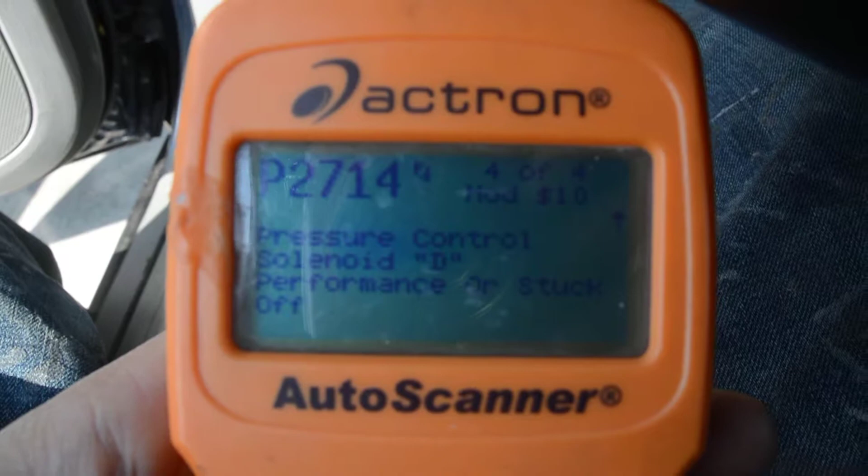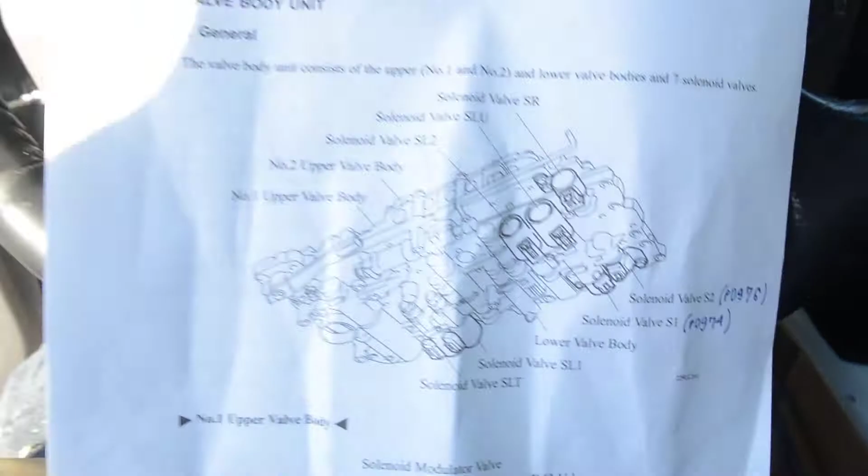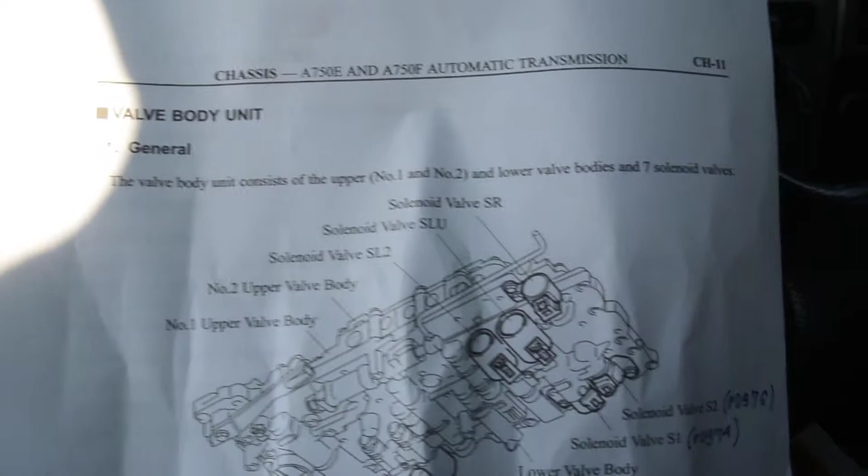Earlier there were 5, and I went online and printed this instruction, and it seems like for this year 2003 4Runner V8, it has an A750F transmission for 4-wheel drive, and A750E for rear wheel drive. I'm assuming they're the same inside.

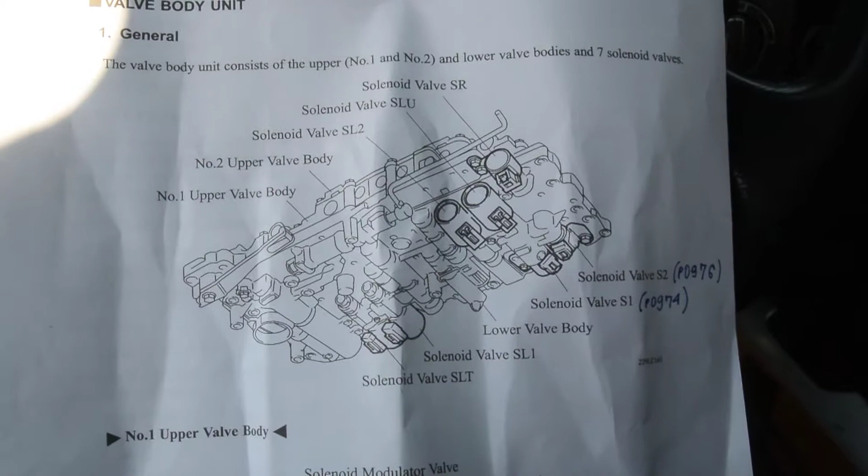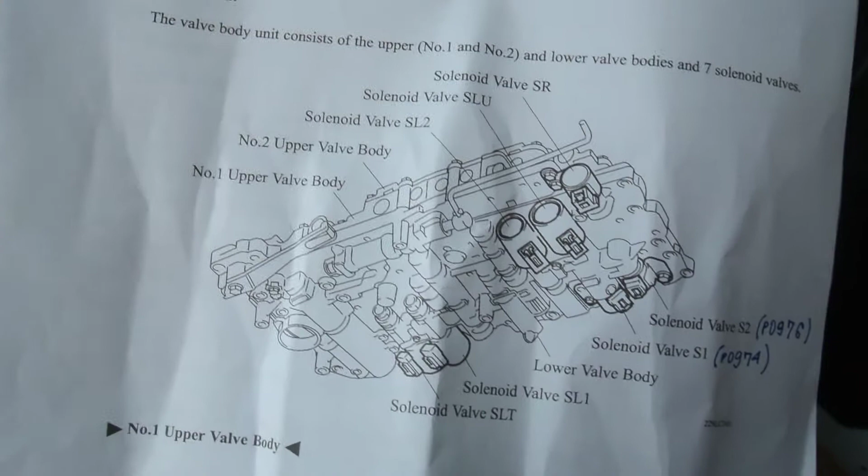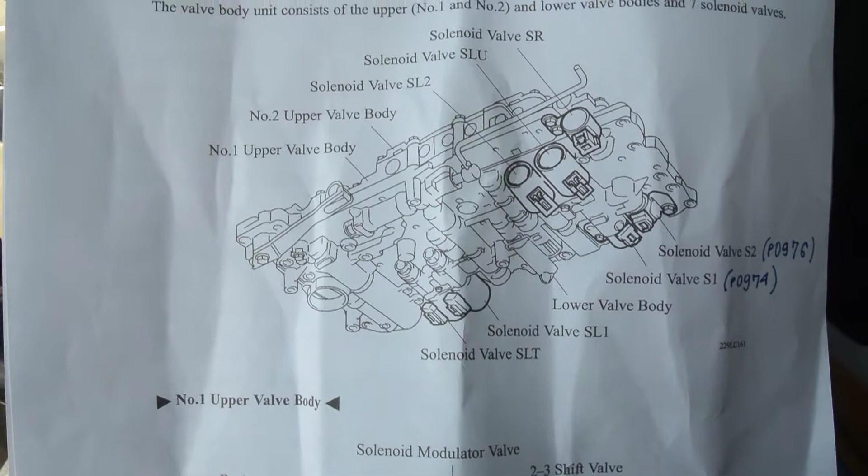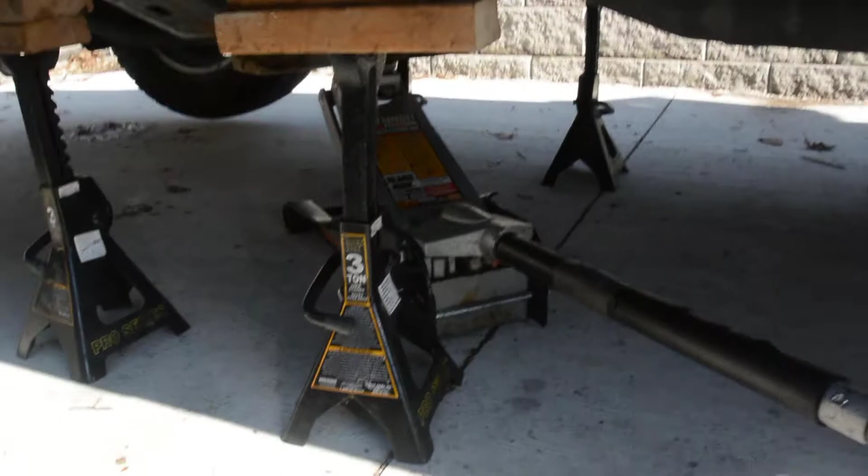So right now, today, I'm just gonna try to remove the pan, and since I do this kind of after work, I do a little bit today, next day, and I already drained transmission fluid from the car. I put the emergency brake on, but I don't think it matters when the car is already jacked up, just in case, I guess. It only does the rear wheels. So I already jacked up the car from all sides and put the jack stands and the jack.

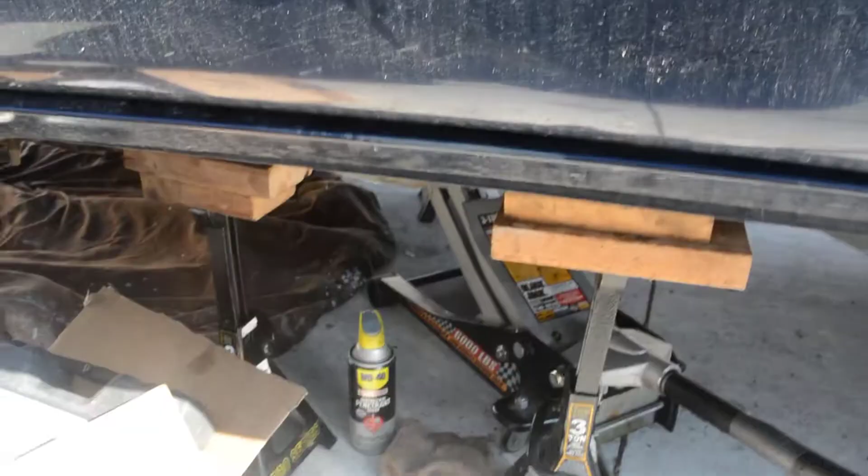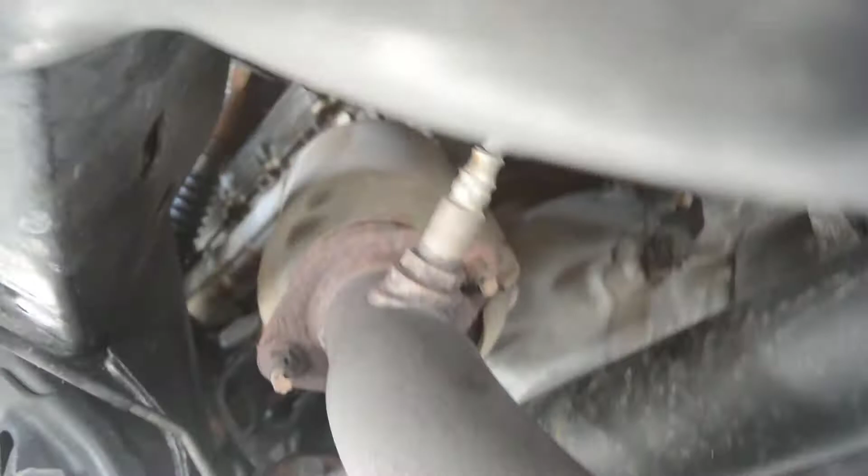So from my understanding, I have to disconnect this pipe so I have access to the transmission pan. I'm gonna use a spray on both sides, here and over there, and see if that helps. And also disconnect the oxygen sensor connector as well.

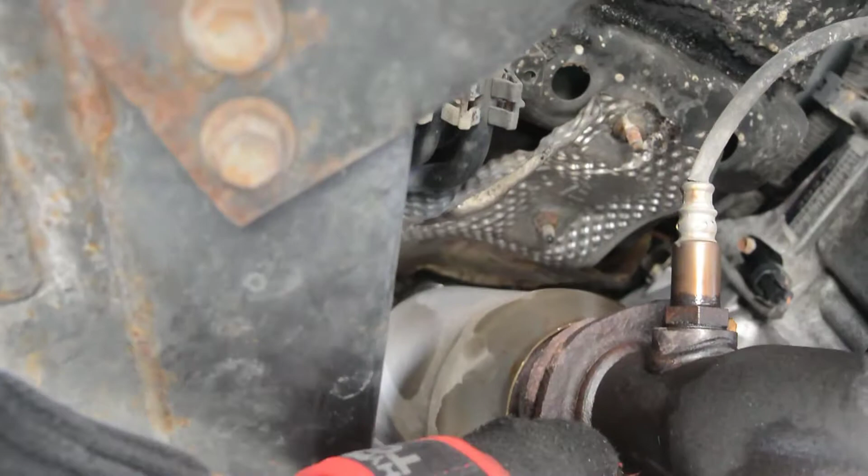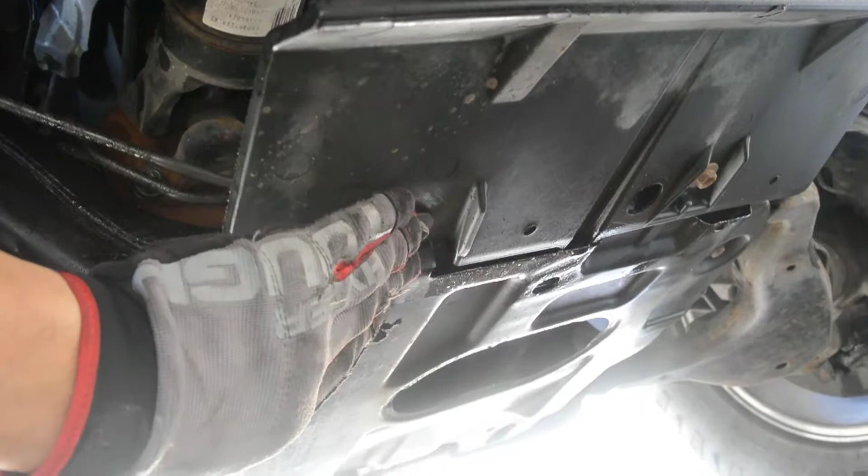So I have been trying to remove these bolts, but it's kind of hard because I don't have any special tools, just the regular breaker bar, and it slips when I try to undo them. I have some ideas what I can do here, but I'm gonna try to remove this pan without dropping this pipe. See what happens. I just realized I need to remove this plastic piece also, and it has two bolts, 12mm. Since I'm gonna work on the car for some time, I decided to disconnect the battery. I read somewhere it's a good idea.

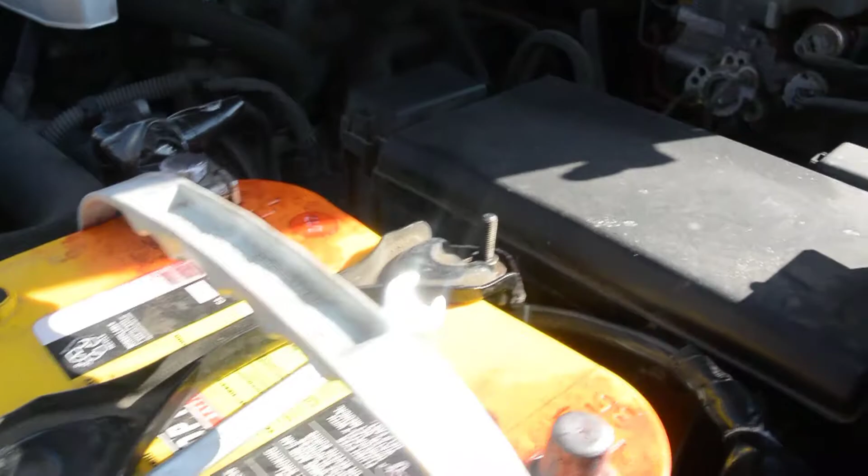I have removed all the bolts from the pan, and I'm gonna use this pry bar tool to try to remove this. Oh, it seemed like it dropped. Okay, and there is something holding it there, and I think this is just gonna come out. So from my understanding, to remove the dipstick line, I have to disconnect this bolt right here.

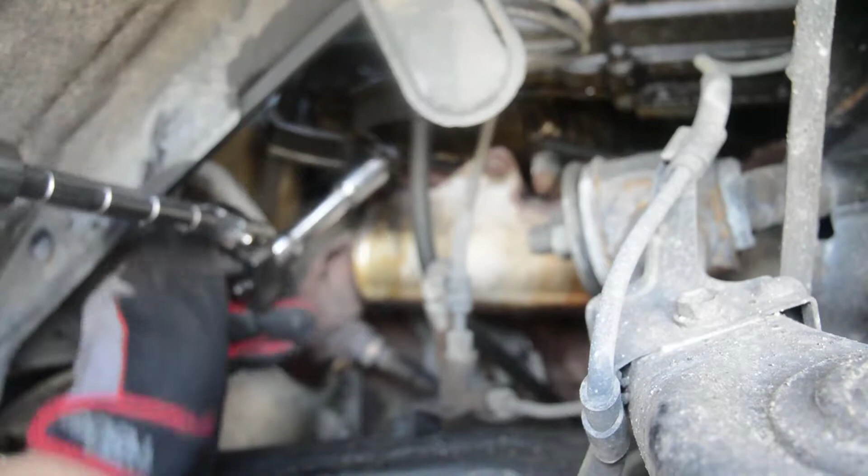So it looks like in my case it's easier to remove the dipstick tube from the passenger side. Well, I didn't have this here, so that's why it's easier. It looks like it's 12mm. I have disconnected the bolt. Now it looks like all I have to do is maybe rotate this back and forth to disconnect the upper from the lower dipstick tube.

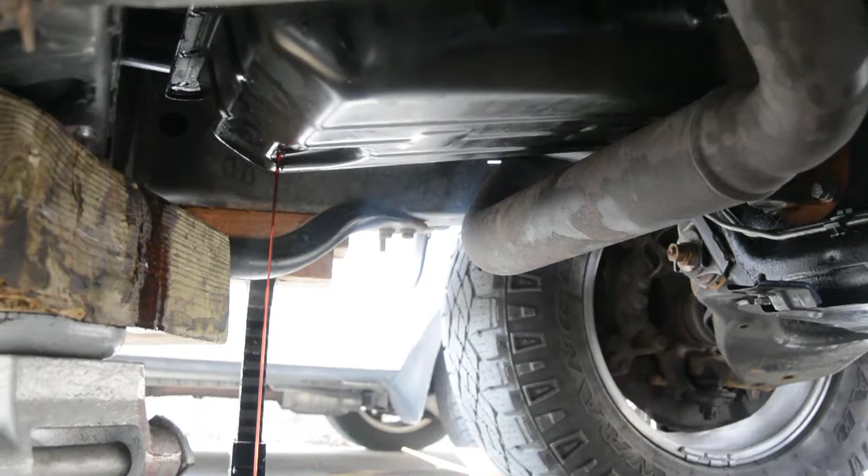Okay, so I'm still trying to disconnect this part right here, and no success so far. Maybe use something like this. Keep going. I also decided to remove the drain plug and release some more oil. Seems like there was some more, even after it all drained the first time. Probably because of the way the transmission fluid pan is tilted. That's why I think more is coming out.

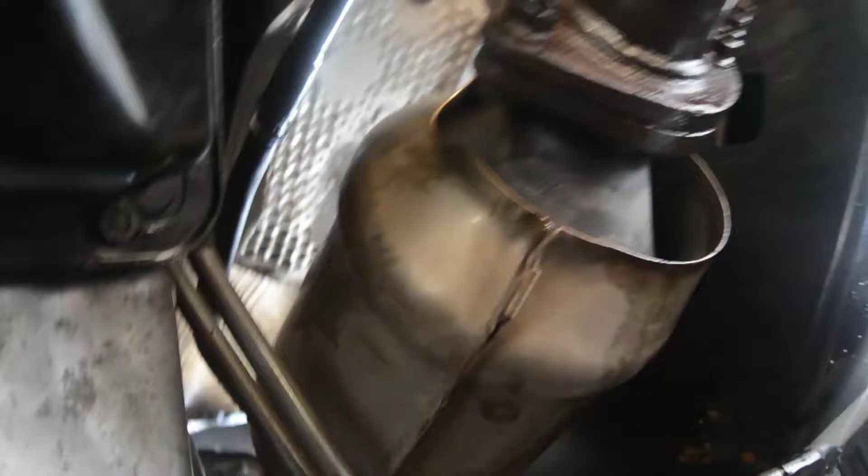I have put two bolts back on the pan so it doesn't move. What I realized is I should have removed the dipstick tube first before removing this. So I put one or two back here, and now I use this tool, I'm not sure the name, and I kind of hit it with the hammer on this side, and it looks like it's coming out now, so it should be fine. So now it should come out, I believe. Okay. If I'd done it again, I would have done this differently. And now I just want to make sure it's correct when I put it back in the right way.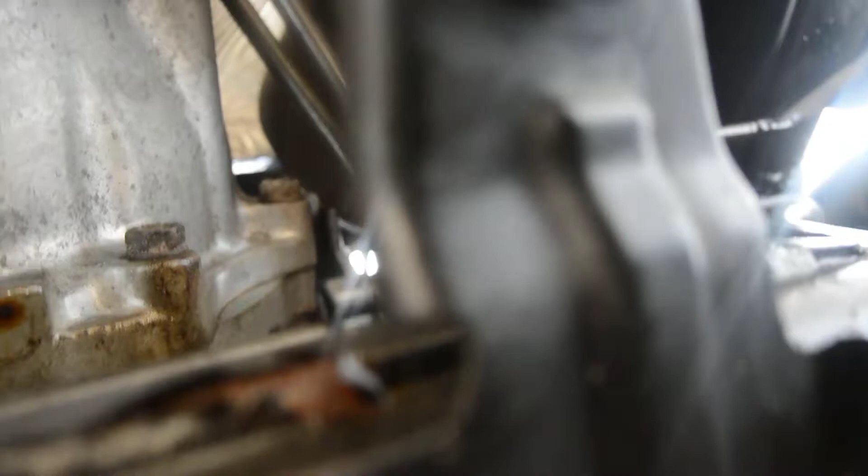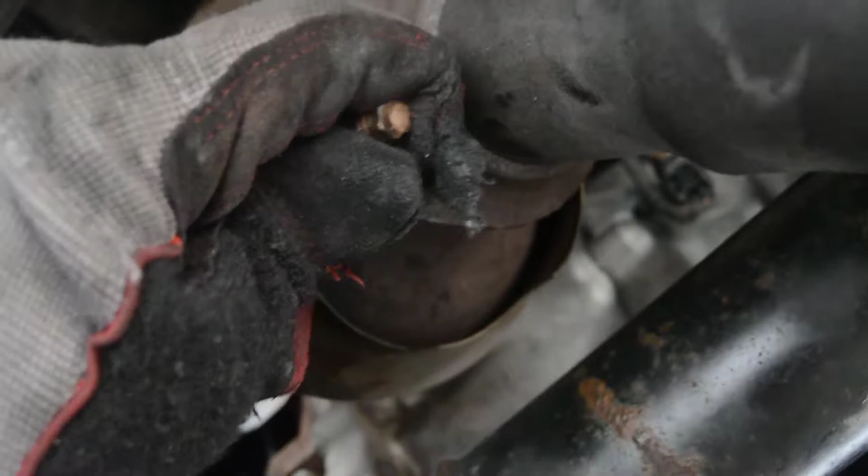So I have removed the dipstick tube, but I realized there's no way to remove the pan. There is no space. So from what I read, I need to remove this, I guess, cross pipe, and from what I understand, I need to have a torch and an impact wrench. I have a torch but no impact wrench, so I'll need to come back for this later. I'm gonna put the oil pan back with two bolts.

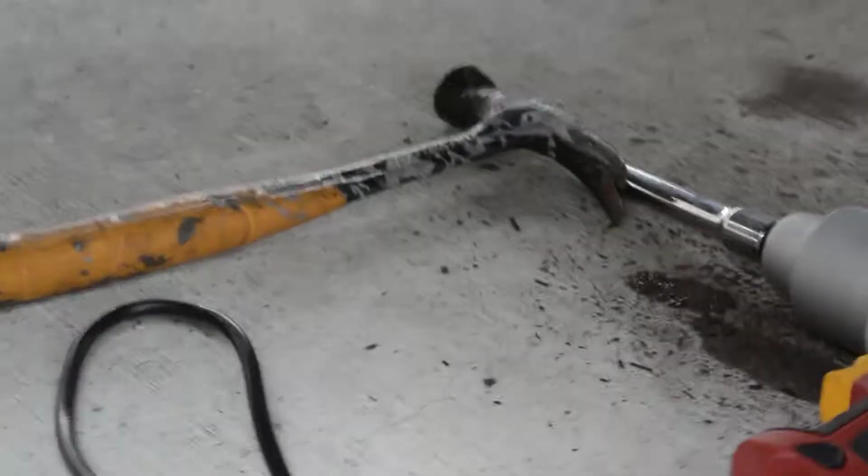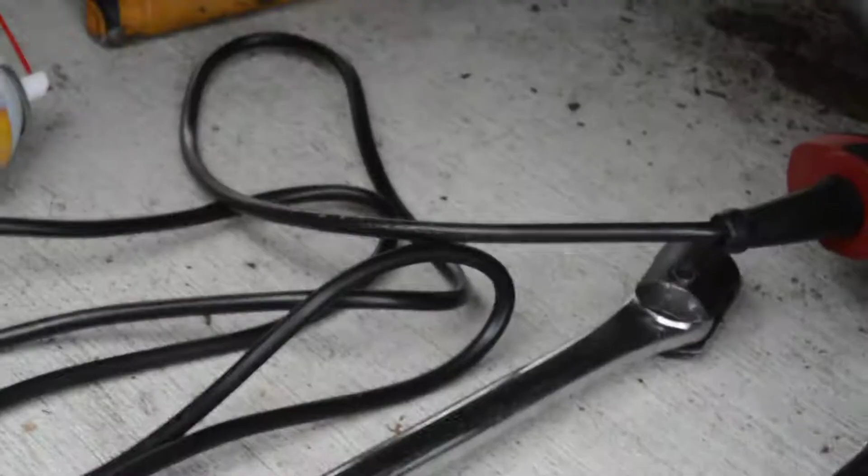I was able to remove the bolt from the exhaust cross pipe. Before, I used this breaker bar and nothing happened, and I went online and read that I needed to get an impact wrench, and yeah, it's actually amazing. It worked. And this one I got from Harbor Freight for $40.

I have removed the bolts, but the pipe is still not moving well, and I think I need to remove this. I'm not sure the name, but these things are holding it. I'm gonna spray it, and let's see, and try to remove it.

I'm using white lithium, but I think the best, from what I read, is to use WD-40. I don't have one. I'm gonna try to pry it with this flathead screwdriver.

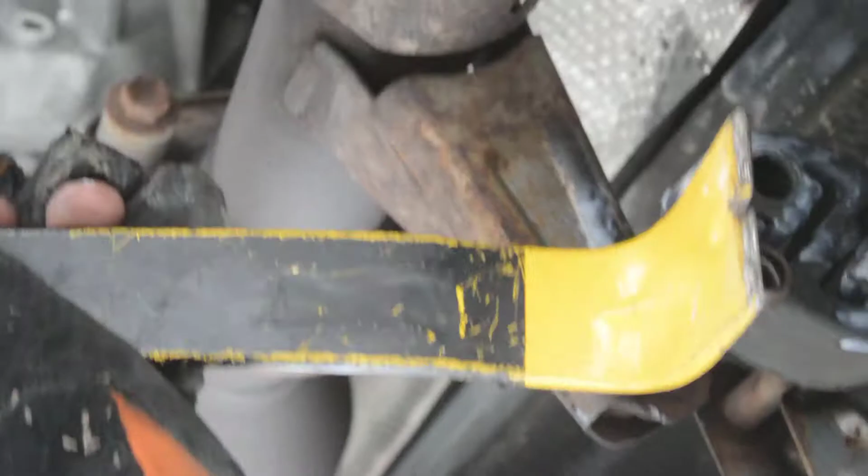So I have removed these rubber holders. I decided to use these two little crowbars and just pried it. It was easier to use that, but I think any tool could be used, whatever works for oneself.

I have realized this pipe is still not moving as much as I wanted, so I think I need to remove these as well.

And this is really good too, I like it. Wow.

I have removed the bolts. This bolt on this side actually stayed, but when I removed this bolt on this side it came out this way. I'm not worried now, I'm just gonna put it back how it was later. I mean, it still has the threads.

And now I need to disconnect this sensor cable, and then it looks like this whole cross pipe should drop. Okay, I have disconnected the oxygen sensor cable, and I just moved this down with my hand, and it seemed like the pipe came down, and I have enough space now here with the transmission fluid pan to move it down.

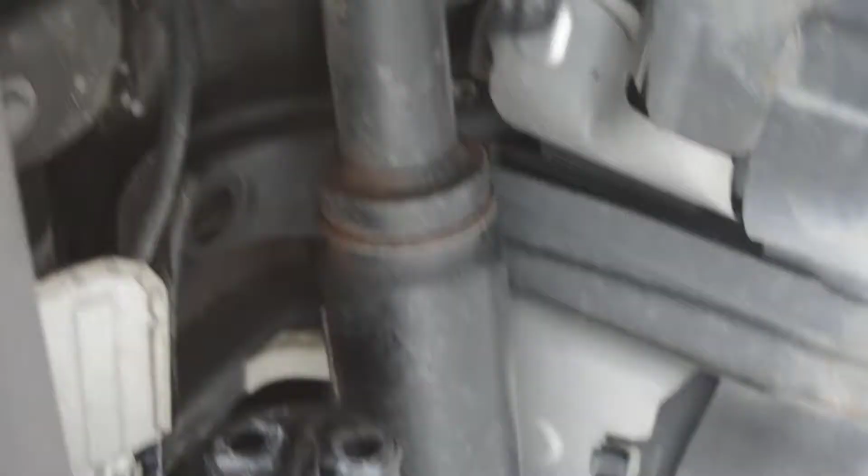Definitely helped that I removed these parts here and over there. Now this pipe can flex. And I just realized, so I don't lose the bolts, I'm gonna put them back here for when I'm ready to install. I don't have to look for them. I'm gonna do this from both sides.

So I'm ready to drop the pan. I have just... okay. Now there's enough clearance. Oh, need to use both hands, I think. Okay. Yes, I finally removed it, and I'm not sure what this means yet.

Again, first time doing it, but now at least I can go online and research how to remove these and then test them. I'm not sure how to test them, but well, I'll look. And this is I guess the filter, and okay, the first part is done.

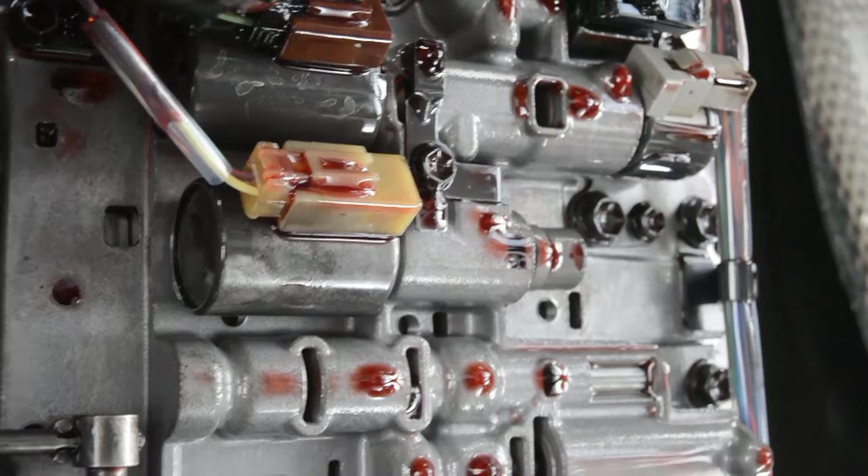I have removed the filter, and from my understanding I have to look at these cables and make sure first that they're not broken, that they're in good shape, and it seems like they're in good shape. So now I'm thinking I need to disconnect each of these solenoids and then test them and see which one is not working.

So 1, 2, 3, 4, 5, 6 of them. I don't even know if they're correct, but I printed the instruction manual, and they tell you which one to remove first. So I'm gonna be doing this next.

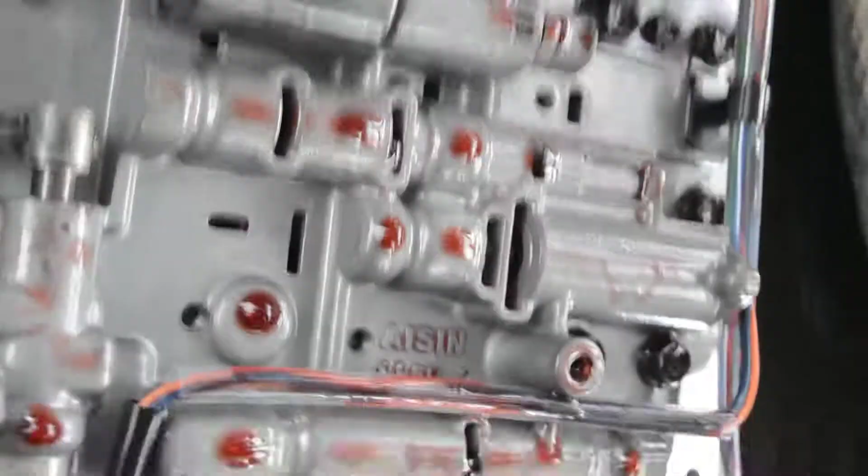I'm looking at the oil in the transmission pan, and I don't see any. It looks very clear. From my understanding, if I see shavings or small metal pieces, it might be a bad sign, but I don't know. I hope it is a good sign that all I need to do is just replace the solenoids.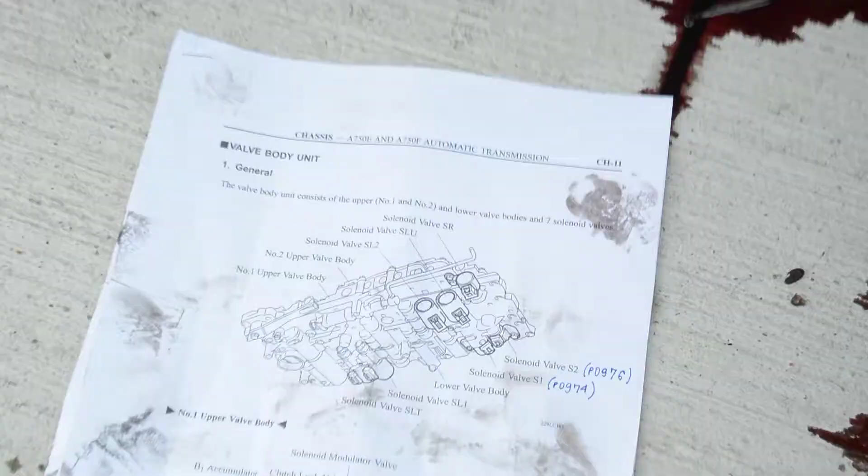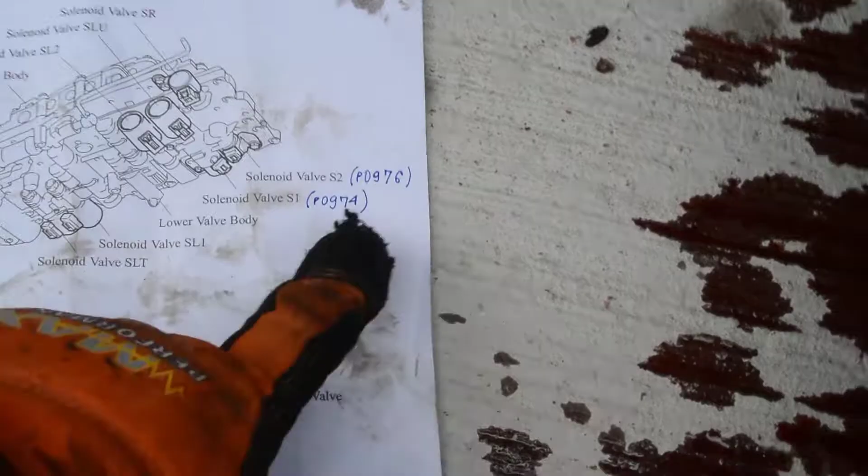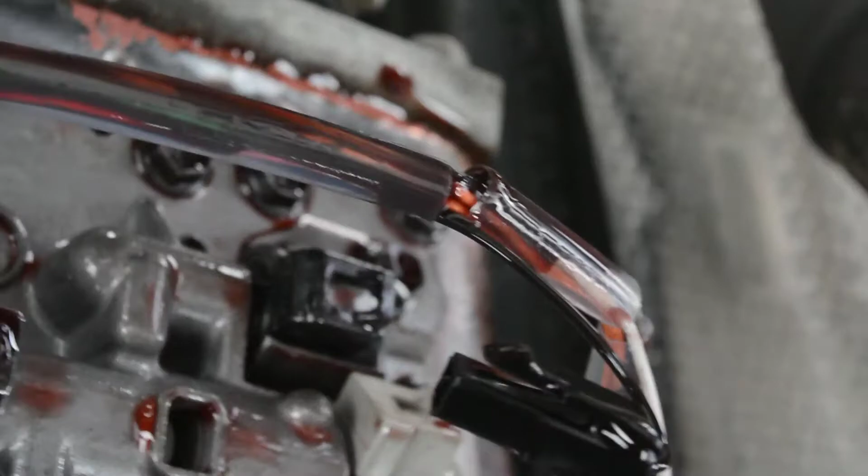This looks like the front, and these are the two errors. I already wrote it down, so I need to remove at least 2 of these solenoids. I'm gonna remove these 2 solenoids. From my understanding, this is P0976 and this one is P097A. And I will need to use a 10mm.

On another note, I just read that it's possible I need to check one of these harnesses before I even started doing this. I'm assuming it's this here, the pin connector, and I was told there might be some corrosion, but I'm just gonna keep going and test this, just for myself to understand. Perhaps this is the issue, but keep going.

Okay, so I just removed this one, and I'm gonna put the bolt back. I'm gonna do the same with this one and then test it at home. I don't even know how they test it, but there's some videos I found.

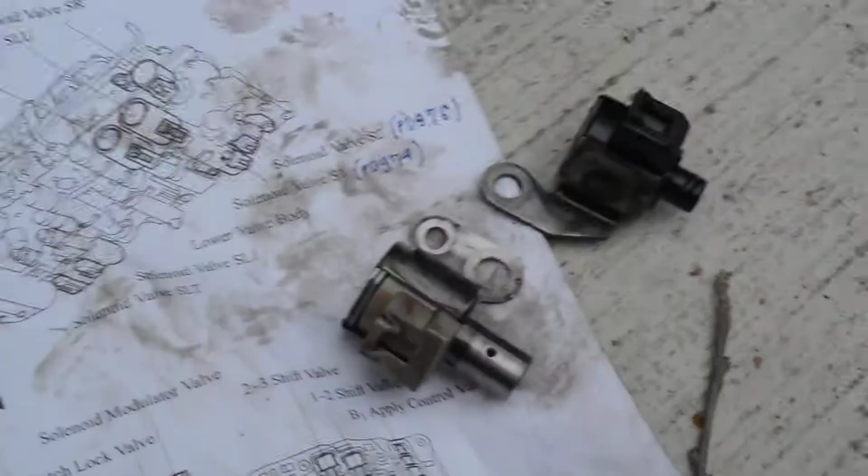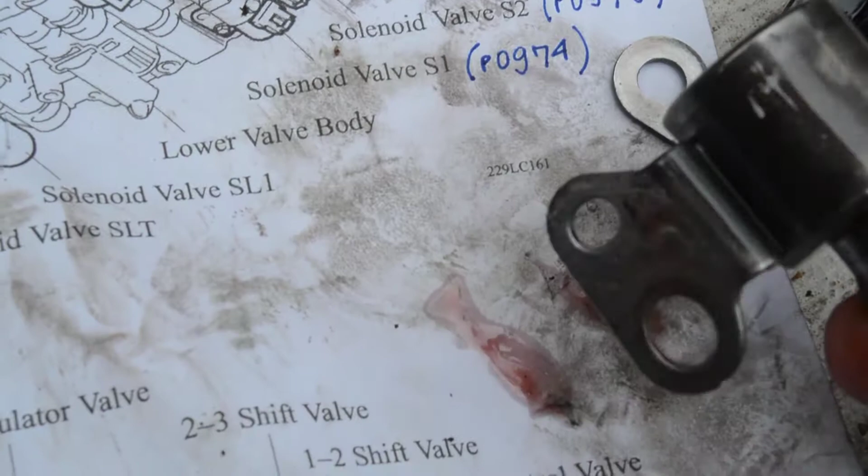Here's what I'm seeing now once it's removed. P0976, also known as solenoid valve S2, and this one P0974, solenoid valve S1.

And since I'm just doing a couple hours today, I'm taking my time. I have put back the cover of the pan with just the one bolt, so nothing gets dirty in there while it's open.